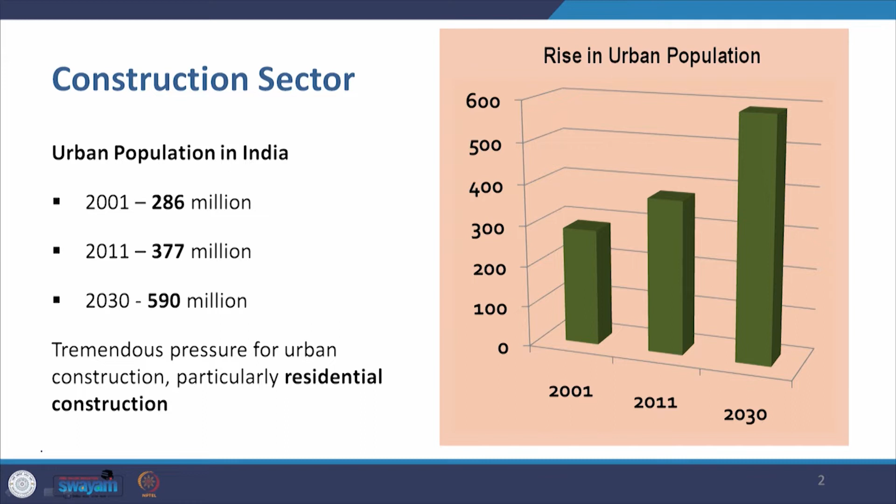For example, in India, the urban population in 2001 was 286 million or 28.6 crore people, and this is going to shoot up to around 59 crore or 590 million people by 2030. There will be at that point approximately 40% of our population living in urban areas. Tremendous pressure is coming on urban construction, particularly residential construction.

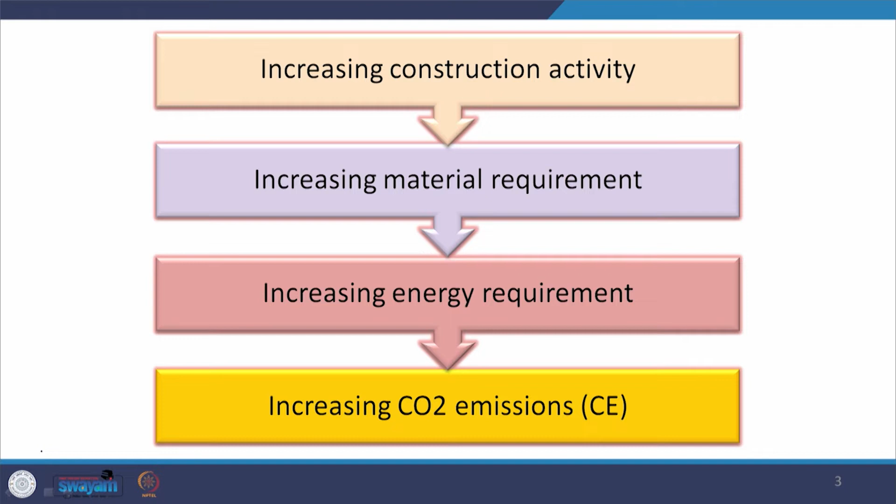Now, it's obvious that increasing construction activity, though necessary for a growing economy like India, is going to lead to some repercussions. It will require an increasing amount of materials, which will require increasing energy to manufacture them, and that increasing energy will result in increasing carbon emissions because we use non-renewable resources like coal to produce the energy needed to manufacture the materials.

As a result, because this is a global impact and not only happening in India, it is happening all over the world in both industrialized and industrializing nations, carbon emission rise will lead to a rise in global warming. It is said that if there is a 1.5 degrees centigrade rise in temperature from pre-industrial levels, right at the cusp when the Industrial Revolution actually began, from that moment, if the temperature rises globally by 1.5 degrees Celsius, there will be a near irreversible change in our climate system.

Now, you might think that this is doable, that we can control it, but please understand the real problem. Recently you might have heard of COP26 that was held, and around that time the UN came up with a report and declared what is called Code Red, which means the global temperature is likely to rise by 1.5 degrees Celsius in the next 20 years. So that totally throws out of the window the 1.5 degrees Celsius pre-industrial level rise, because this is way too much.

The impact is going to be extreme heat waves, drought, flooding, melting glaciers, rising sea levels, and this is already happening. There have been floods in Germany of a kind never heard of before, and recently massive floods in Pakistan, in regions that have normally never really seen that level of flooding.

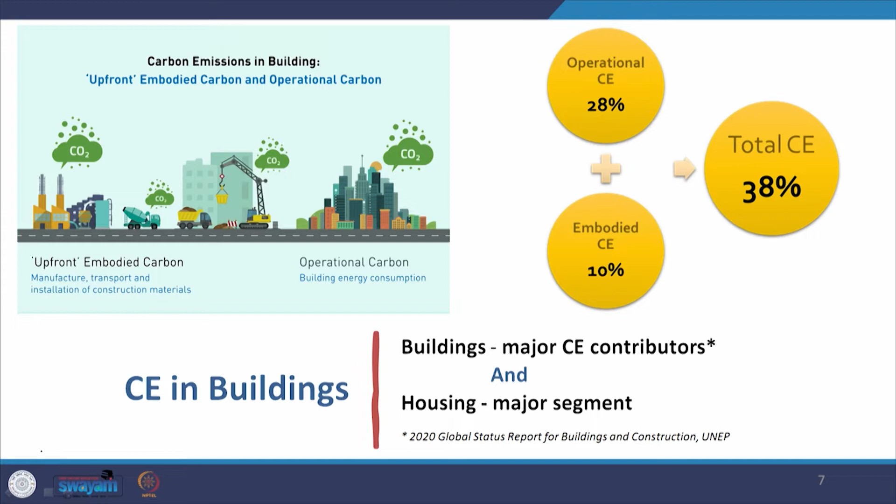The second is operating carbon emission, which happens as a result of operating the building - air conditioning, heating, digital equipment, lighting, all electrical fixtures, etc. The total carbon emissions from both works out to be 38%, about 28% from operational and about 10% from embodied. This figure comes from the 2020 Global Status Report by the United Nations Environment Programme.

Now, therefore, both these have to be targeted in order to reduce carbon emissions. I personally work in the area of embodied carbon, but there are a whole lot of people focusing a lot of attention on operating carbon. In this presentation, the focus will be on the reduction of operational energy and thus operating carbon.

There is sometimes an overlap in the usage of the terms sustainable and green - sustainable building and green building. Of course there is an overlap, but green building happens to be a subset of sustainable building. A sustainable building or sustainable environment includes environmental, social, and economic sustainability, whereas green buildings are primarily focused on environmental sustainability.

Sustainability talks about three things: acceptability, equitability, and viability of whatever technology we are trying to use - for the sake of the environment, for the sake of people in general (the social response, how we can prevent damage to the social structure), and how it can be economically profitable, because any venture we take up to bring about sustainability must be an economically viable model.

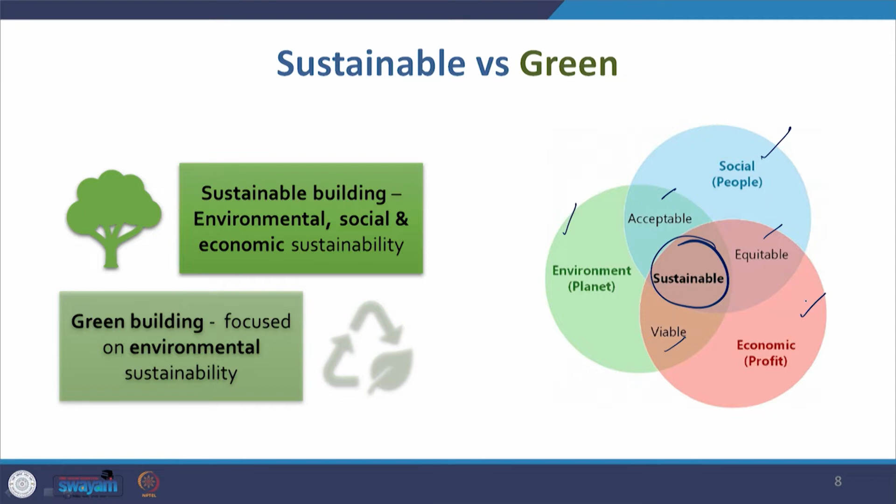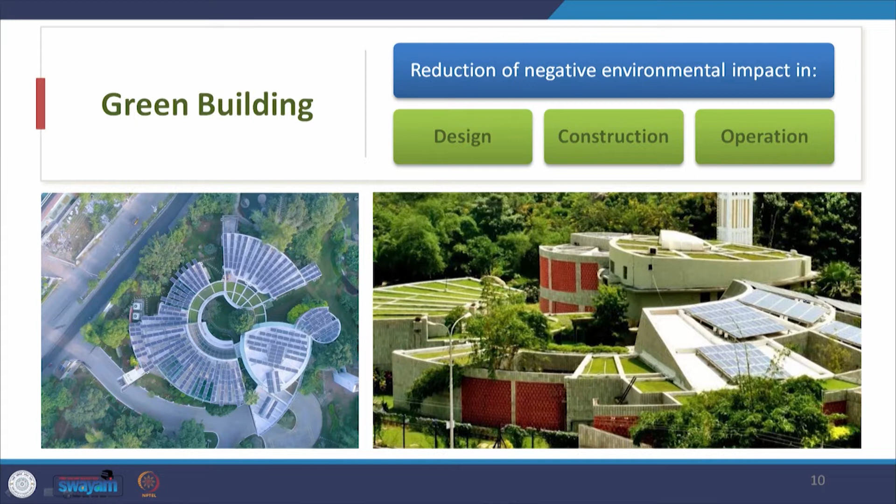Green buildings are focused on three important things, the SDGs linked with it. We focus on reducing the negative environmental impact through design, construction, and operation of the building. The picture you see here is the first platinum-rated green building in India, and continues to be one of the greenest buildings in India - the IGBC Godrej building in Hyderabad, designed by Karan Grover.

Now, to use a simple term, I'll call green buildings climate responsive buildings, because green talks about many more things - water efficiency, resource efficiency, etc. All of that forms the ambit of environmental sustainability, but my focus is going to be on energy and the reduction of energy that we can achieve through buildings, thus leading to reduction in carbon emissions.

Why do we need climate responsive buildings or energy efficient buildings? In the earlier days, as I talked about regarding critical regional buildings, I had repeatedly mentioned that climate is one factor no architect working in India can ever neglect. It could not be neglected by the people who came earlier than modern times, earlier than even the British - the Mughals. All of them had to factor climate into their buildings.

The British had to do that - Lutyens and Baker had to do that, and other British architects had to do that. Corbusier and Louis Kahn had to do that, and then Indian architects who followed them with modernism also had to do that.

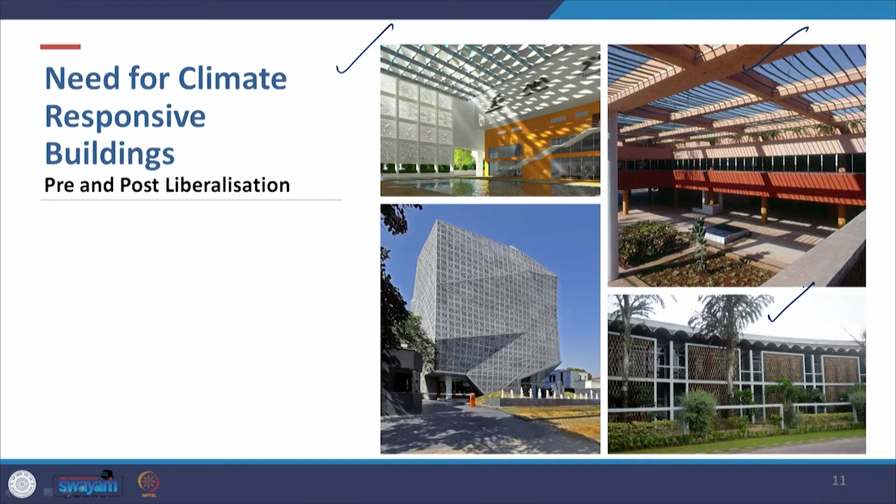Similarly, when we look at the jali work we saw in India International Center, a case study by Stein, the jali work is very efficient for thermal comfort. It does a great job letting the wind blow in faster because of smaller apertures, increasing wind velocity and providing a cool breeze entering the building. The accordion doors open up.

You can look back on the slides, I told you that, and how the entire room turns into a deep veranda, etc. Now, the same concept applied by Sanjay Puri in 72 Screens, a building we'll study, is again done computationally, which is a far more efficient jali, but it's a modern jali. So what has really happened is an amazingly wonderful marriage of traditional systems and modern technology, producing the critical regional buildings of the 21st century.

Sanjay Puri is one of those people driving that change. He was born in 1965, graduated from the Academy of Architecture in 1988, apprenticed with Hafeez Contractor, and started his self-practice in 1992. He promotes innovative design solutions that contribute to sustainability and spaces meant to revolutionize the way we experience them.

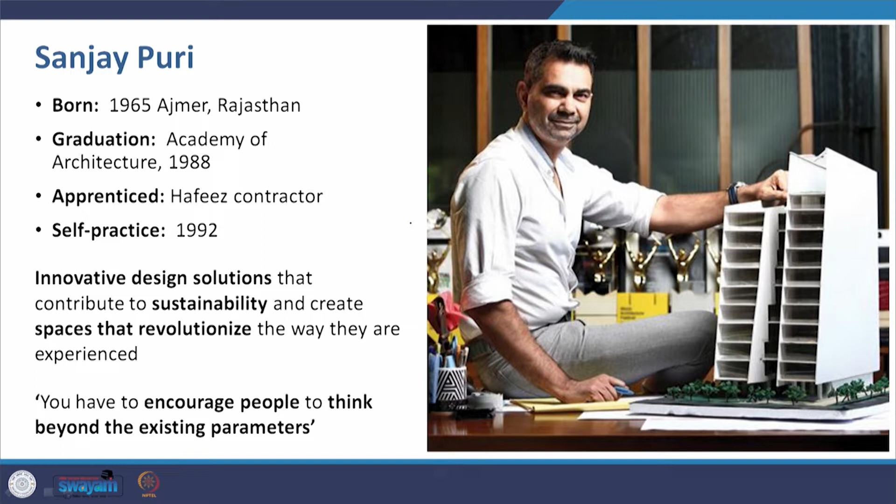He says you have to encourage people to think beyond the existing parameters, and so he has done very interesting and iconic buildings which have come up, and are coming up, in housing, office buildings, retail, entertainment and private houses.

This is a vernacular space interpreted for the modern house. The principle is the same, but the idea is interpreted in terms of modern architecture. That is why it is so important for us to focus on traditional knowledge systems, not to neglect them. That knowledge, evolved and picked up by our forefathers over centuries of learning in a particular region through trial and error and experience, is a vast source of principles and concepts that can be applied in modern houses. Let me give you an example.

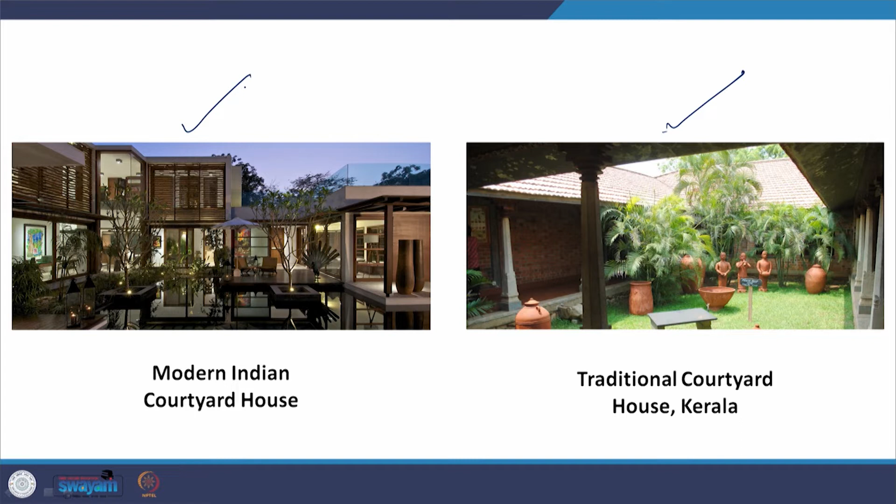Classical architecture, Greek architecture, talks to us about classical symmetry. Now, classical symmetry is a principle, not something just for Greek temples. Any building can adopt classical symmetry, and it has been widely adopted by so many architects. So that is one way we can pick principles and adapt them to modern buildings.

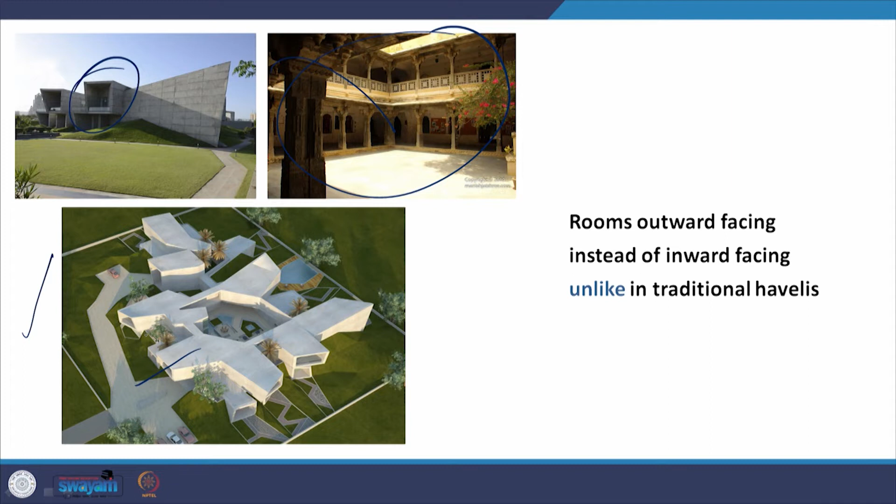Now, in the courtyard house in Ajmer, Sanjay Puri does one thing very differently: the rooms are not inward facing towards an internal courtyard, they are outward facing towards the landscape. Here you see a standard courtyard where all the rooms look into the internal courtyard, but in his house, as you can see in this model, all the rooms face away from the internal courtyard.

Now, if I compare his house with a very vernacular courtyard house, this is an example from Udaipur having a central courtyard and smaller courtyards. This is a 3,000 square meter house planned around a central courtyard, with smaller courtyards spread throughout, and small water bodies around the courtyard.

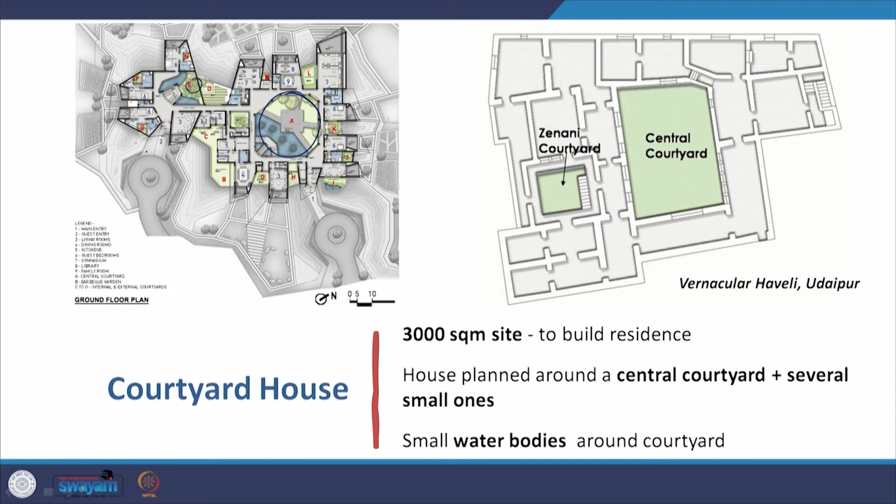Very simple principles of green and blue infrastructure to cool the building and keep it thermally comfortable.

This picture indicates the approach, and this one indicates the composition of variously proportioned concrete volumes, and they are amazing. Architecture in its form and aesthetics is not neglected by technology. This is a statement I mentioned earlier, that science is not leading to bad buildings or bad aesthetics. In fact, it is contributing to better aesthetics, because we can do things with our buildings that would not have been possible before.

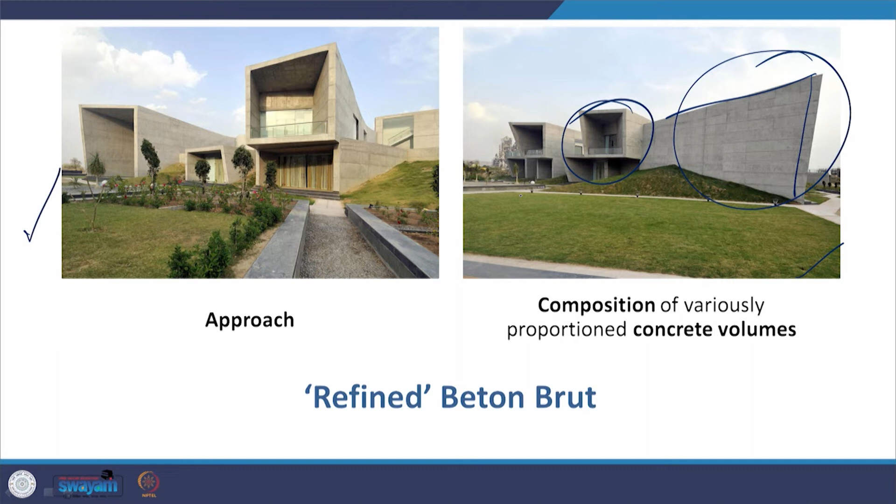Here, for example, this is on a monumental scale, and within this one double height room are accommodated 2 floors at the rear of the house. This is an amazing form that he has generated out of refined beton brut.

Here are views of the landscape from all sides, and it seems as if the house is growing out of the ground, a fortress-like mass.

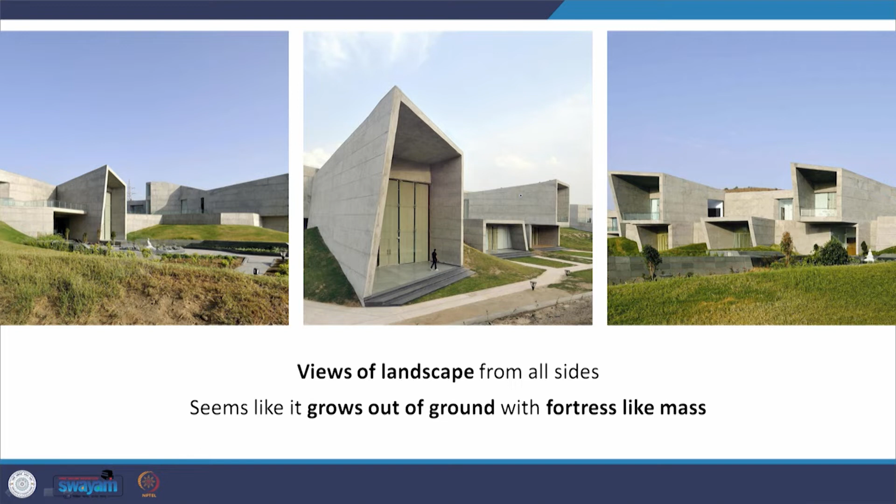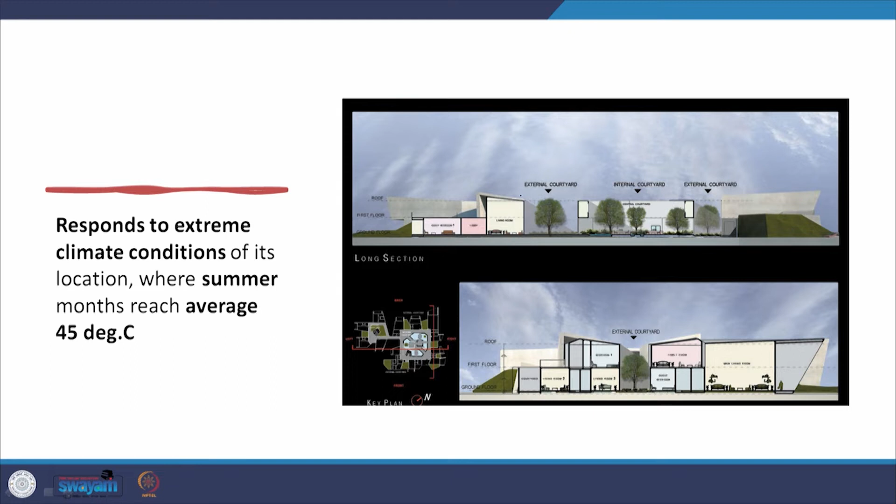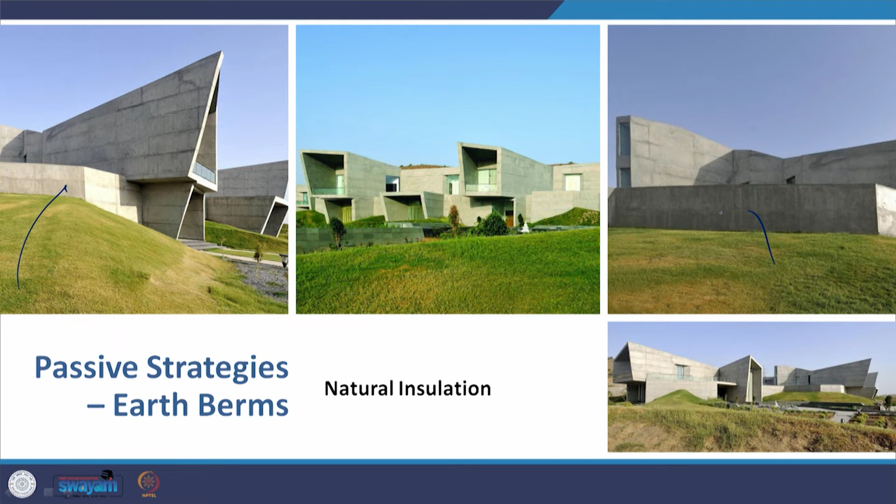Now it responds to extreme climatic conditions of its location, Ajmer, where summer month temperatures can rise to an average of 45 degrees Celsius. The passive strategies he employs include earth berming: by providing earth berms on the side of the house, he provides natural insulation from the earth. On the ground floor, most spaces are linked to the internal courtyard and smaller open air courtyards, and he creates integration with greenery into the house.

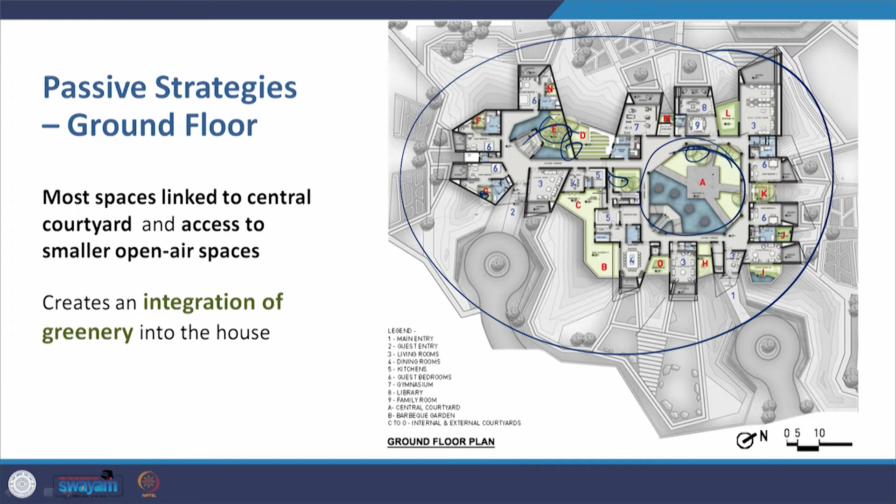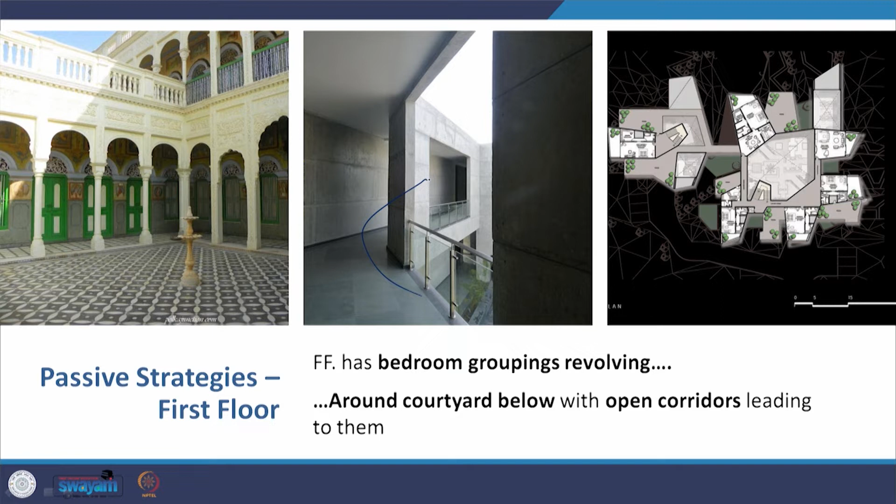So there is greenery all around, and greenery within the house, spread throughout the house in smaller and bigger courtyard spaces. On the first floor, the bedroom groupings revolve around the internal courtyard, with an open corridor leading to these bedrooms. This courtyard connects all these spaces.

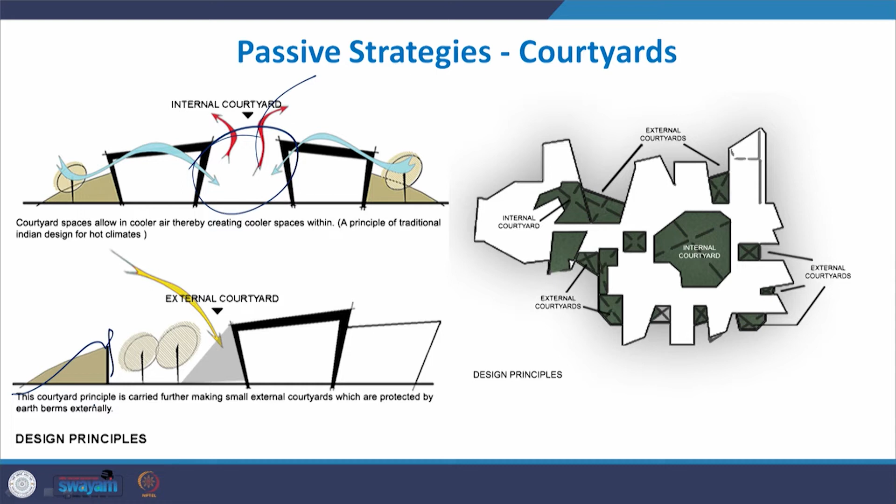Now, this is how the effect of the courtyard starts taking shape. The cool air moves in, the hot air rises and cools this place, but he does the same thing interestingly on the outside also. Because of the earth berm, it acts like one of the walls of a courtyard, and thus this space also functions very similar to an internal courtyard.

Then he talks about shade and shadow. This shows how shade and shadow impacts the building in summer, morning and evening, and in winter, morning and evening. Setting aside winter since it's not as important, in the summer, at a particular moment of the day, this shadow pattern shows how much of the house is mutually shaded by its own form, and how much shade is available to us.

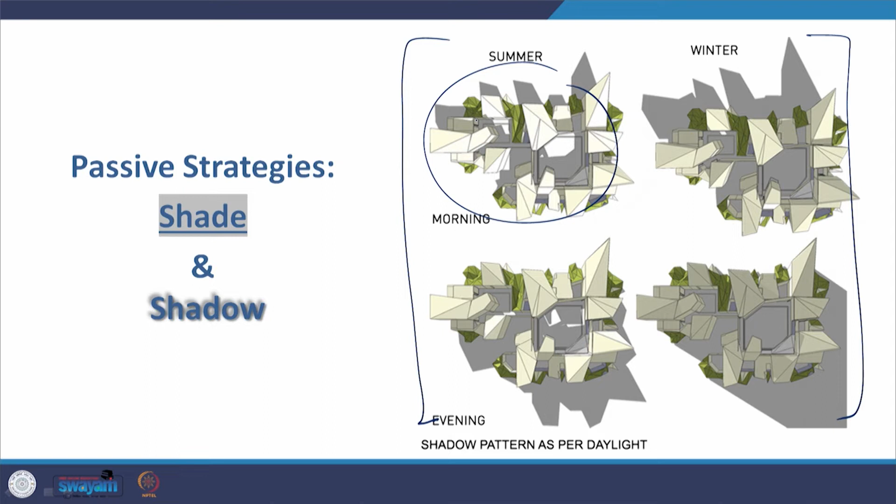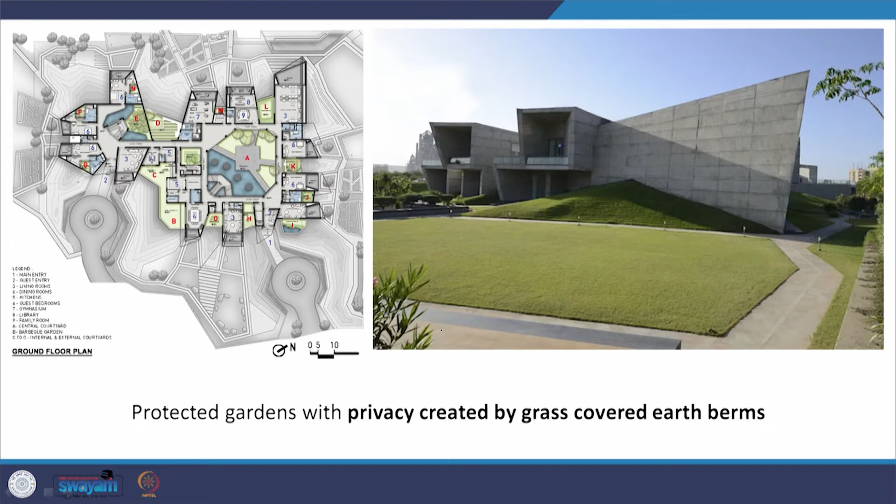Then the gardens are protected with privacy created because of the earth berms. So the earth berms are not only serving the function of providing natural insulation, they are also serving the function of providing greater privacy to the occupants.

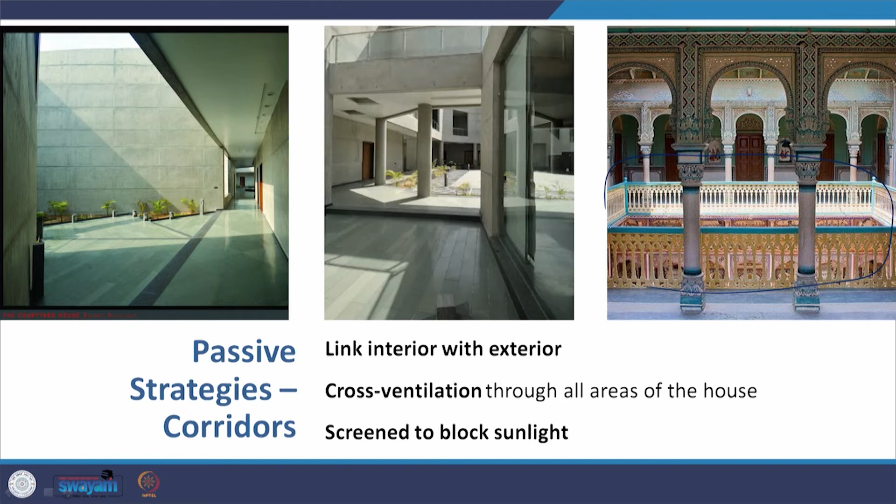Then there is the passive strategy of the corridors themselves. They link the interior with the exterior. They provide cross ventilation to all areas of the house, just as would happen in a standard corridor in a courtyard house, and they are screened to block out the glare of the sun, allowing diffuse light to enter the interior spaces of the house.

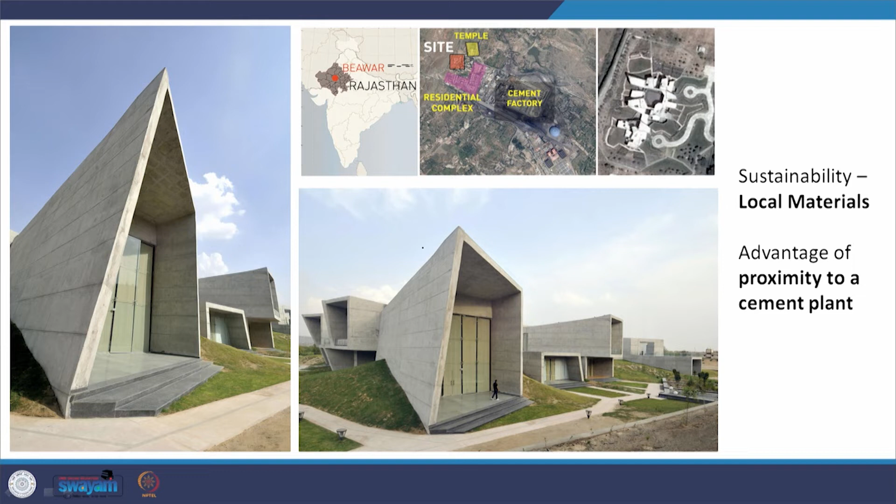Now, sustainability comes through the use of local materials, which is another thing that happens in green buildings, where materials have to be sourced within a particular diameter of the project. Here, the advantage is that he is using exposed concrete, and the house is in close proximity to a cement plant, so the massive amount of cement required to build this big house could easily be sourced from there.

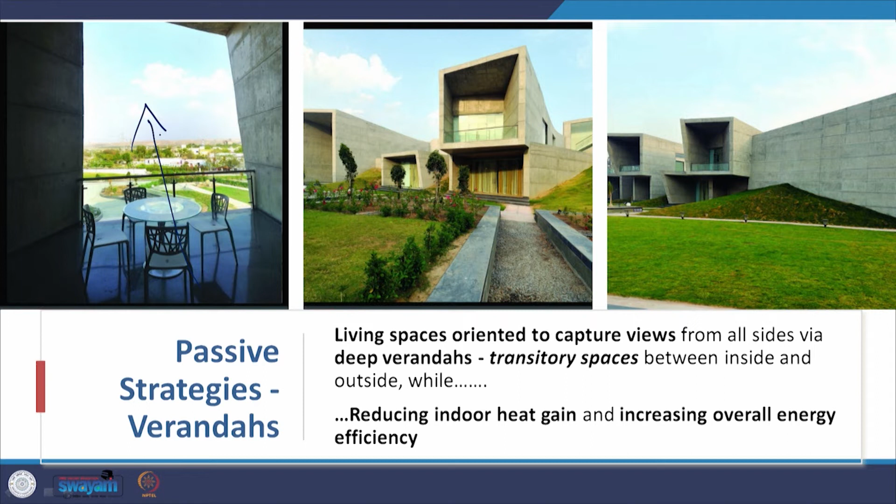Then there is the veranda leading into the room, reducing indoor heat gain and increasing overall energy efficiency, because when we reduce heat gain, we reduce air conditioning loads, and thus efficiency in terms of energy increases.

Now, as a passive strategy in conclusion for the house, the concrete structure itself works as a thermal mass, and thus it is able to retain heat within itself in the daytime, and at night time in the desert climate when it becomes cool or colder, it releases the heat and makes it comfortable.

The principle of traditional Indian courtyard houses to tackle heat and create a cooler environment with cross ventilation is present all throughout the house, along with increased privacy and provision of shade for the occupants.

I've been through it in a very summarized manner. You can study this in great detail. It's available online and in literature.

This shows how principles of traditional courtyard houses of Rajasthan have been applied here. When you look at the house, it doesn't at all seem like a traditional dwelling. It is a totally brutalist, refined Béton Brut house. But when you look at it closely, you start seeing the traditional principles behind it.

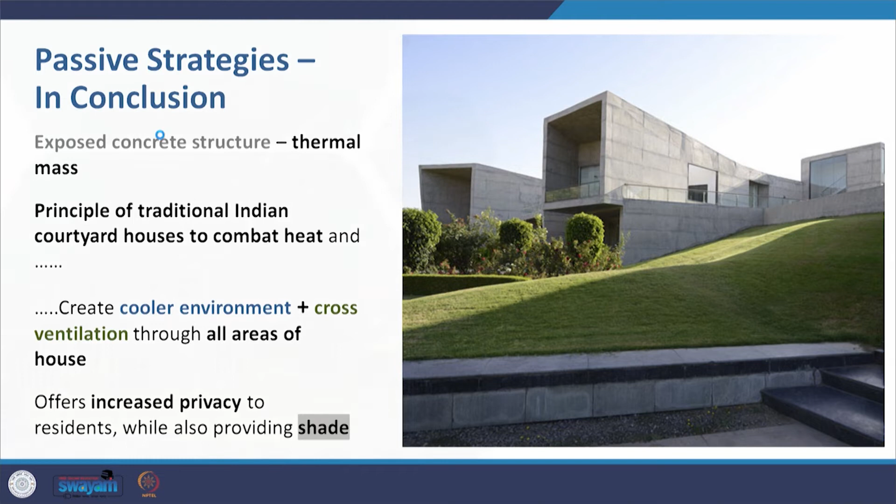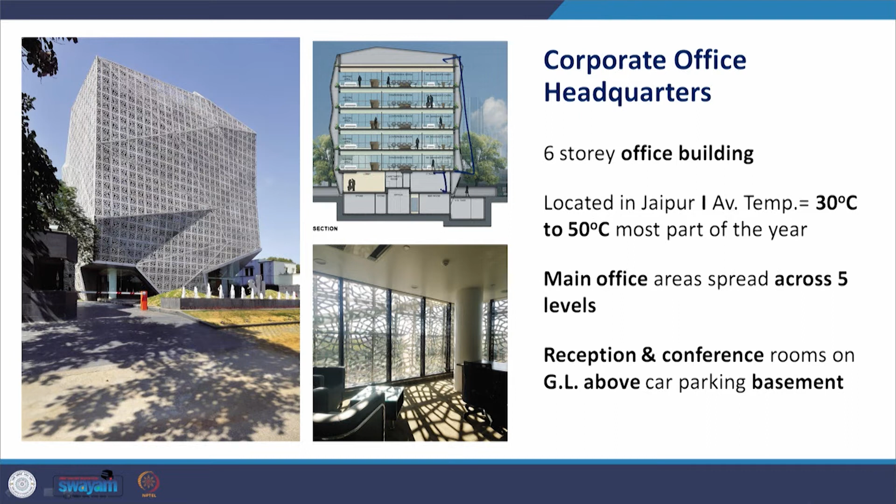Then there is the 72 Screens project by him in Jaipur, 2013. This is a corporate office headquarters, 6 stories high, located in Jaipur, where the average temperature goes from 30 to 50 degrees Celsius most part of the year. The main office areas are spread across 5 levels, with the ground level below that, and the basement car parking underneath. The primary focus of design was to minimize heat gain.

Now, these case studies, the first one the courtyard house, and this one, are both in the hot and dry climate belt of India.

Here what he does is he blocks the southern facade from where the heat would penetrate. How he does that is he provides the services on the south side - the pantry, the gents' toilet, the staircase, the lift, etc. on the south side, and blocks it. Thus, the columns are on the periphery, and the internal workspace is completely flexible.

And there are glass reinforced concrete jalis all around the building, which are in an abstract angular geometry to filter out the heat. Now, one question will arise in our mind: why the south side?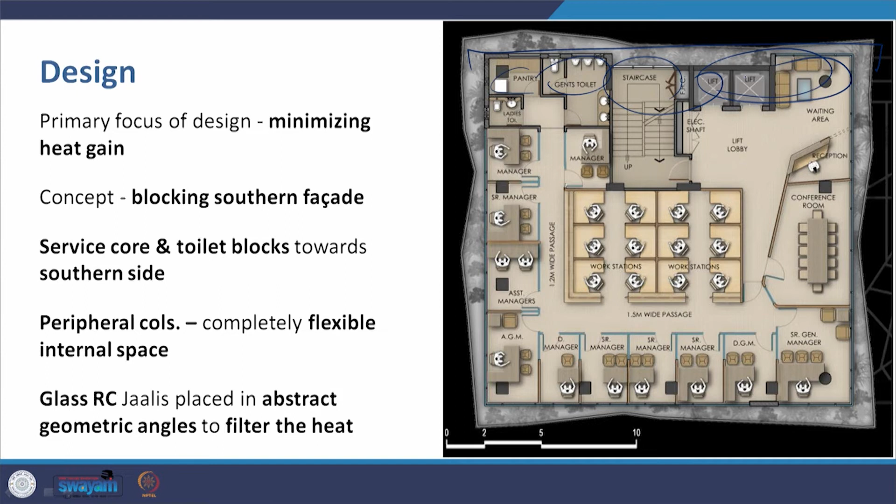It should be the west side. We've always been taught the west should be kept like a blank wall, no fenestrations. He should have provided the services, etc. on the west side. Why doesn't he do that? Because it's an office building, and this is what happens.

First of all, like I told you, technology is helping us today. Contemporary software has enabled the study of the solar path to understand sun penetration inside the building. As a result, this is how the morning solar path is, and this is how it is indirect light throughout the day. Somewhere in the middle of the day, the sun will be coming through like this, and this is how it will be in the evening.

Please understand, in the evening the office mostly will shut off, people will go back home, the work time for most people will be over. It is during this time, when the work day is at its peak, that we require maximum thermal comfort - we want to keep out the heat gain from this side, the southern side. And this is what it is doing.

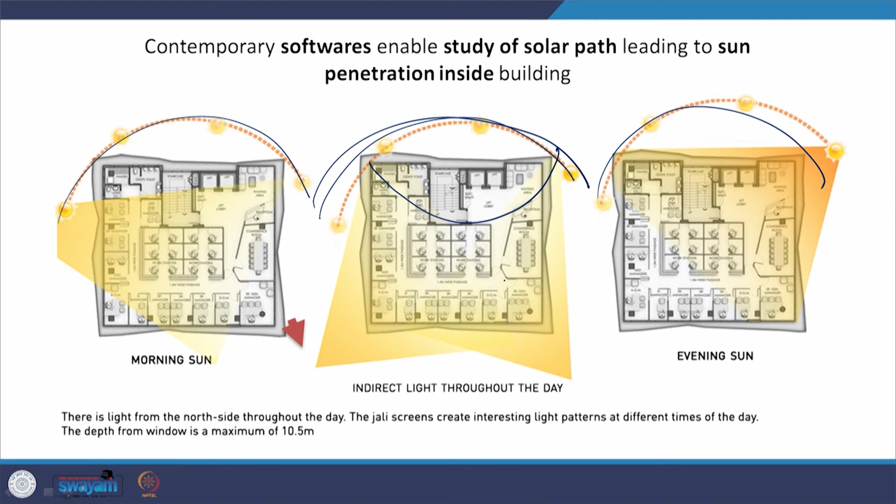The other thing is, because of the jali, very interesting light patterns are created within the building. We'll have a look at that later. If you watch it very carefully, this segment shows us that the sunlight is not able to penetrate into the workspaces from this side.

Now, the glass RC jali envelopes around the building, and it is a direct derivation of the jalis of Rajasthan, inspired from them. This is the jali, the way it's been used in Rajasthan Haveli - this is how it is. And so this is the computationally derived jali in glass reinforced concrete, and this is the sciography it is creating within the building.

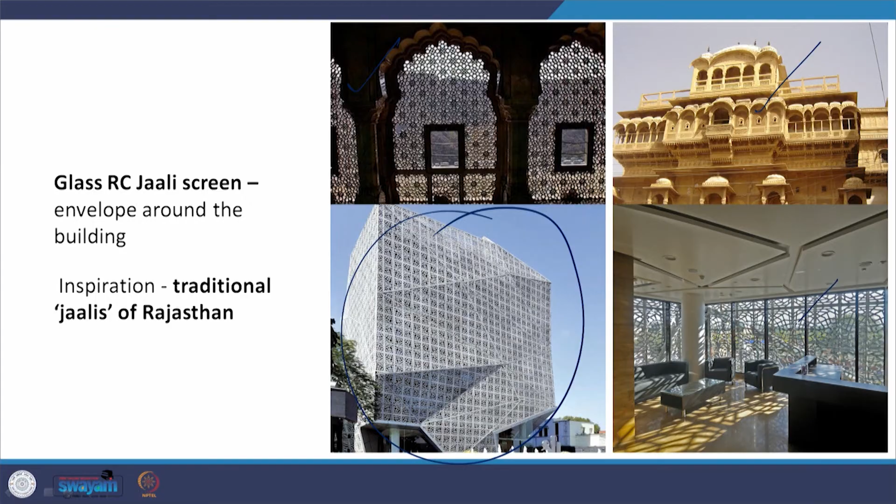It is an abstract folded plane mounted on a steel framework, as you can see here, and it was designed and assembled using computer technology. It is an important climate responsive feature of this building, preventing heat gain from all sides and also increasing ventilation, because the wind flows through the jali, increases in velocity, and that good breeze penetrates into the building.

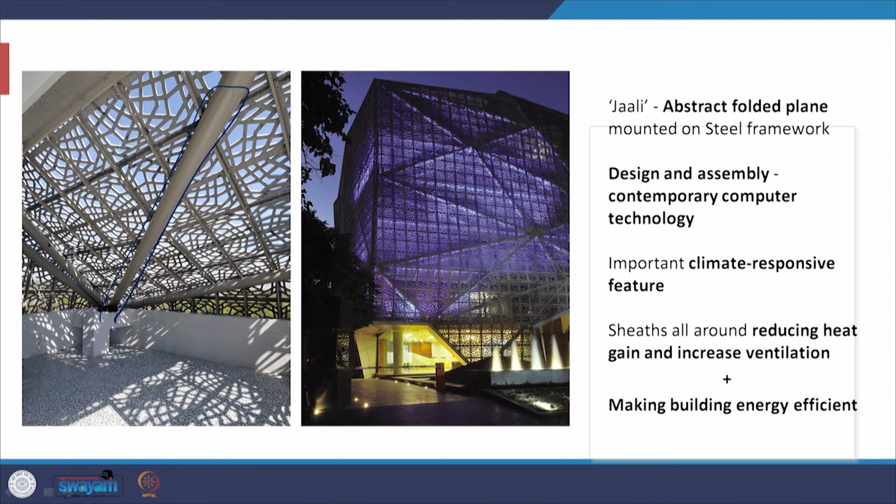Because of the jali, the building becomes energy efficient due to reduction of heat load. It also provides better daylighting without glare, which reduces the lighting load too.

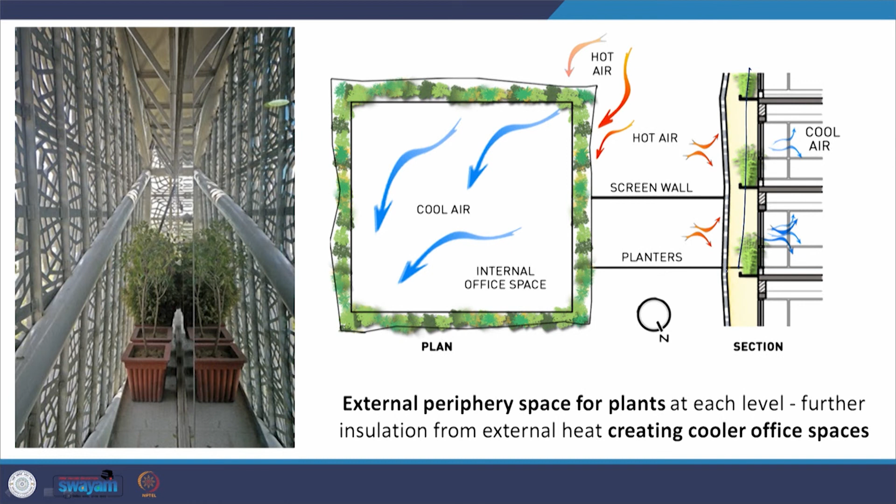Here is how the cooling of the building works - cool air penetrates into the building. The other thing is that between the jali and the interior of the building, they have provided plants within that space, which also serves to create cooler office spaces. So the screen creates this pleasing ambience with the sun streaming through, and this is a kaleidoscopic sciography that happens within the building.

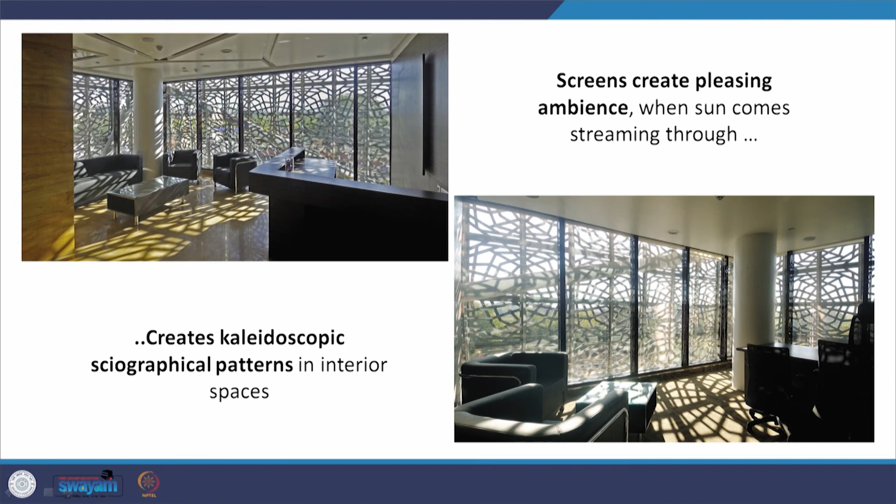Now, the architect does not neglect the architectural or aesthetic component. The trapezoidal planar geometry reflected in the glass RC jali work continues in the interior, in the ceiling, in the counter created for the receptionist, and in the layout of the furniture within. So the trapezoidal geometry is consistent throughout the building.

It is very similar to the way in which F.L. Wright used to use geometry. He would build the entire project on one geometry - if it was triangles, pentagons, or hexagons, the entire geometry would be built around that polygonal shape.

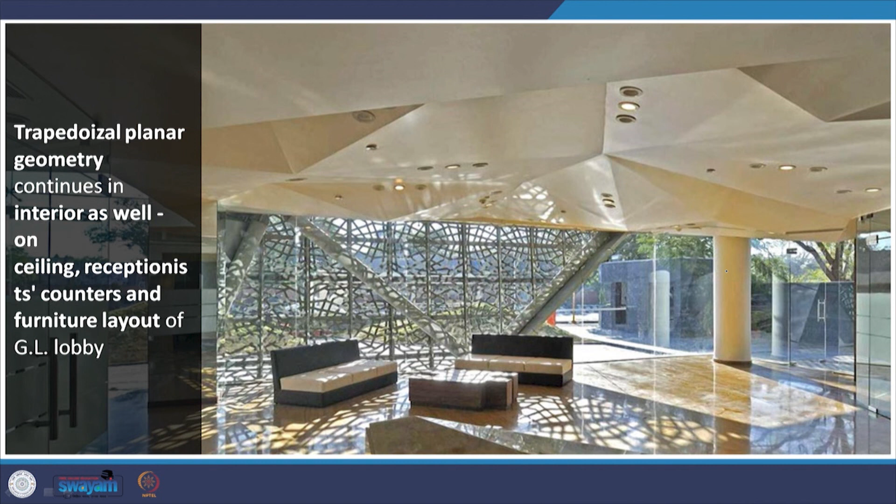So this presentation primarily focused on why there is such a great need of climate responsiveness today, because of the need to reduce carbon emissions, and also the great advantage that technology is giving us today to modernize or use traditional systems in a much more efficient way in the buildings of today.